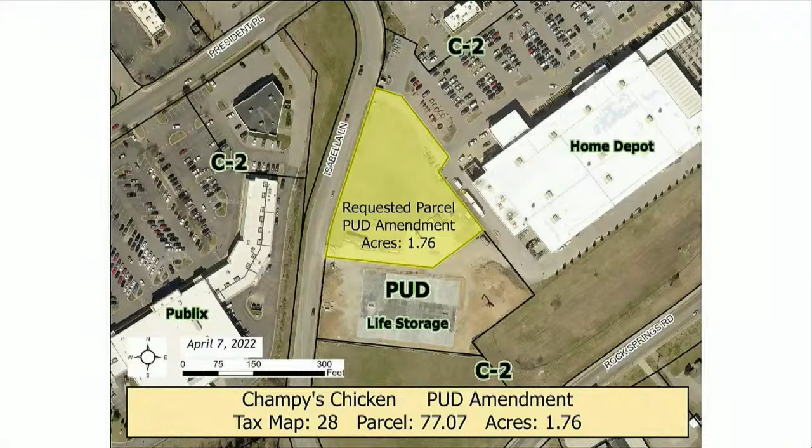That life storage building it would sit in front of is going to block a lot of it. That's a tall building. And I think this corner down here will develop as well at some point, so your sight line off of Rock Springs is at some point going to be blocked from that point of view. I know this corner behind Home Depot at Isabella already gets a lot of looks, so I think it'll add to the blockage of that side of the building. But it's on a grade too, so they're up high, on top of that hill, at the highest point there.

With the frontage to Isabella - that's the reason I asked the question earlier - that seems to be predominantly the 95% approved material, correct? Correct, yeah. I think about the other side, at the Home Depot parking lot side, with all that rental equipment sitting there - it's not the most attractive thing, so I don't worry about that side as much as I would if it were another business that didn't have all that equipment sitting out in their parking lot.

Like I said, it's attractive. It's a good-looking building. It's unique, and your marketing aspect of that is great. I mean, people will know what they're going to when they see it.

As far as the neon for clarification, the sign ordinance actually does allow for neon signs, so that's certainly something you all could include if you wanted to.

Okay, our next item is Ayub Ishak, Delacy Place, 12372 Old Nashville Highway, rezoning request C2 to PRD. This is a rezoning request. You all have seen a similar request on this property recently, but this is different than what you looked at last time. This is a PRD request, about 13.85 acres, requesting to rezone just a portion of the parcel, not the entire parcel. The surrounding zoning is a mix of C2, R1, and R2. The land use plan for this area is the Old Nashville corridor character area, which would support a mix of neighborhood-scale retail and personal services as well as townhomes and attached residential. The major thoroughfare plan shows Mason Tucker Drive extending as a collector from Todd Lane through the site to connect with Old Nashville Highway at the existing intersection with Rocky Fork Road. This extension would be difficult at that location due to TVA power poles in the area near Old Nashville Highway. They have shown an extension proposed to align with the proposed driveway for Talia Trace, which has been approved by the town council, so they would line up at that location. This requested PRD is again different from what you looked at before. It's 100 townhomes, with 5.18 acres of the parcel to remain C2, which would basically be all of the Old Nashville Highway frontage.

There is a cemetery that is actually part of the property, it's all part of this parcel. They are including that in the rezoning request, but it will be divided off as part of the development, and the family would maintain that parcel ownership.

We did have a few comments regarding fire hydrant locations and some dimensions of the hammerhead turnarounds, and they have addressed that. The hydrants would actually be shown on the site plans, and that's fine.

We did ask for a traffic study, and they did provide that. We did receive that, and there are a few recommendations from that. Basically, the road extension will be a 3-lane cross-section, and then obviously a lineup as we discussed, and then the intersection, when the four-way intersection is created with Todd Lane and Mason Tucker, it would be a four-way stop condition there. So that is one of the recommendations of the traffic study.

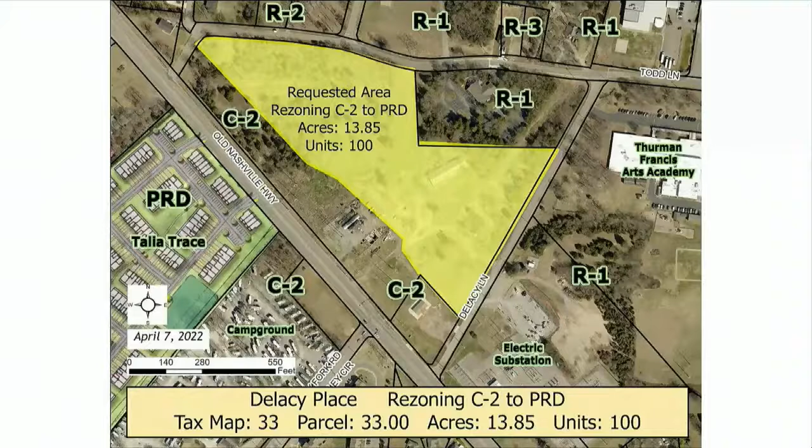Do I have another motion? I can make one, I don't know if they're gonna like it. But make it. I'll make this motion to approve the staff comments and reverse flip the west side units that currently face the Todd Lane units. Add back patios on all units, fenced back patios with all units. And on the east side of Mason Tucker, remove the 6 units that face Todd Lane and give that to playground space. Okay, you've heard the motion. Do I have a second? Second. I have a motion and a second. Further discussion?

All those in favor of this motion, please signify by saying aye. Aye. Opposed? Aye. 6-1. Okay.

Mr. Chairman, yes, just out of respect of our citizens' time, I would like to do a time check and point out that we've spent a whole lot of time on the first two. I just want you to know we realize that. That's fine, I think the discussion was worthy of the time given on both. Both were, I don't think difficult's the word, but both were challenging as far as working through and making sure that we get it right for the town.

Our next item is item 3 under rezoning request: Hardik Patel, corner of Almaville Road and Seminary Road, rezoning request I-2 to C2. Yeah, this is just a simple rezoning request, no PUD on this one, just I-2 to C2. It's about 2.94 acres at the corner of Almaville Road and Seminary Road. It's a vacant tract of land. Surrounding zoning is a mix of I-2, R3, R1, and PRD, which is Belmont to the east and Preserve at Stewart Creek across the street. Those are all the zonings in town, and then also RM in Rutherford County.

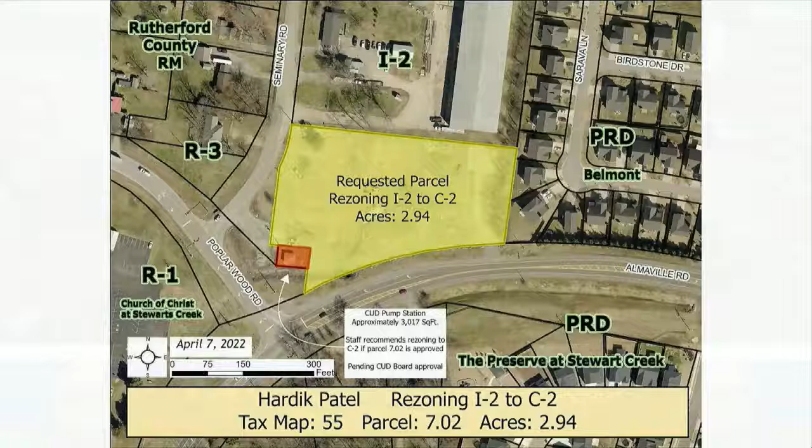As far as a buffer on that, with a road frontage we would probably want to beef up the streetscape there on that side to help block any parking spaces with lights and pulling in and that sort of thing. We would also try to limit the lighting at those property lines.

So it's something we could certainly address at site plan to make sure everybody's comfortable. And that would be the same if this were an I-2 and an industrial development came in — we would look at limiting the buffer, adding buffering, and limiting the light, making sure the lights shine internally and not externally, those kind of things.

I guess personally, I like that better than a machine shop or something else that would have that industrial use right there on Almaville Road, right next to a neighborhood like that.

Used to be a recycling center, I think that was brought up, and it's quite loud — trashy is the best way to say it. They would pull in and separate all the trash. I remember when it was there, years ago. It's no longer there; that business isn't there anymore.

Kevin, I didn't hear you — did you say there would be or not be access on the 102? Well, that's up to TDOT, I don't know what that access would be, that's why I'm asking the question. They'd have to get permission from TDOT to have an access cut there.

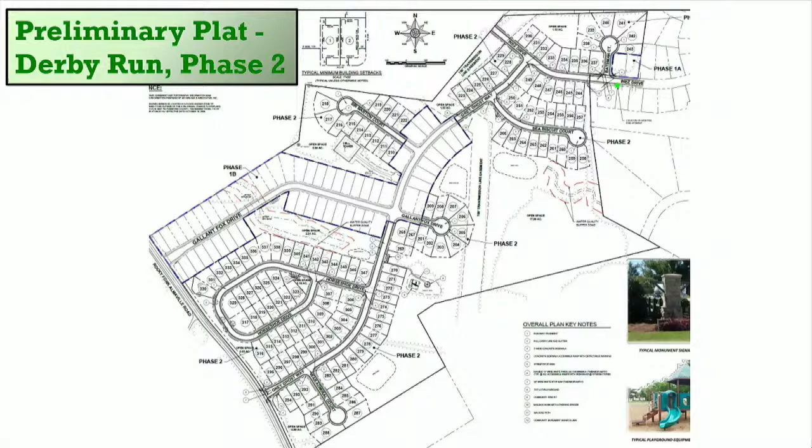Comment number 6 regarding the critical lots — there are about 3 critical lots we thought met the criteria, and they have designated those 3, so we can remove comment number 6.

Comment number 7, they are showing the right-of-way. We did ask them to label that at 40 feet from the center line. They're showing 15 feet from the existing right-of-way line, and we asked for 40 feet, measured from the center line. So we would want to keep that comment.

Comments 1 through 5 we would keep as well; those are just standard comments. Comment 7, as I pointed out, and then 8 through 10 are also kind of standard comments we would want to keep. Then 11 and 12 we can take off — those are utility plan and construction plan comments. We did point those out to them, but we can remove them.

So it's 1 through 5 and 7 through 10. And with those, we can recommend approval of that plat.

Kevin, I'm hearing this is consistent with what we previously looked at. It's consistent with the approved PUD, yes.

Anything from the commission? Do I have a motion? Move to approve with staff comments. I have a motion to approve with staff comments. Do I have a second? Second. I have a motion and a second to approve with staff comments. Further discussion? Hearing none, all those in favor signify by saying aye. Aye. Opposed? This motion's approved.

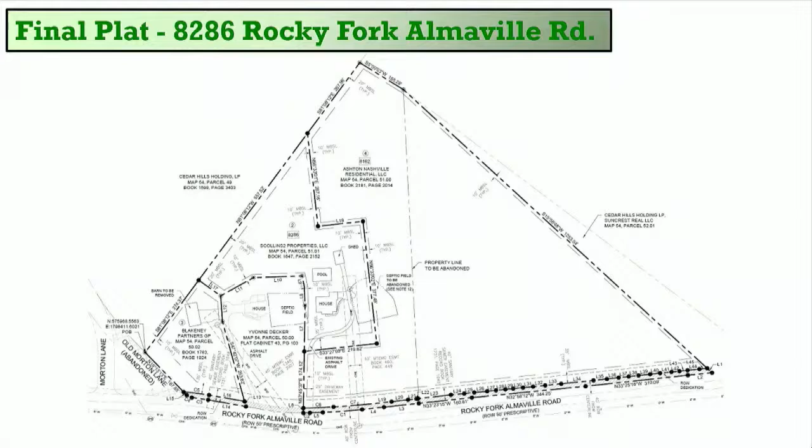It's 3 lots, about 20 acres total, but 3 separate lots. We had 3 comments. First, they are showing the right-of-way along Rocky Fork Almaville Road. They do still need to add the land surveyor's signature and then the owner's and CUD and TDEC prior to recording. So we will need to keep all 3 comments, but with those 3 comments, staff can recommend approval.

Okay. Questions for Kevin? This looks pretty straightforward.

Do I have a motion? Motion to approve with staff comments. I have a motion to approve with staff comments. Do I have a second? Second. I have a motion and a second to approve with staff comments. Further discussion? I'm going to abstain, Chairman. Okay. All those in favor of approving this item signify by saying aye. Aye. Opposed? This motion's approved.

Our next item is Cedar Creek Townhomes Phase 1, Enon Springs Road West. Owner developer Alcorn Properties LLC.

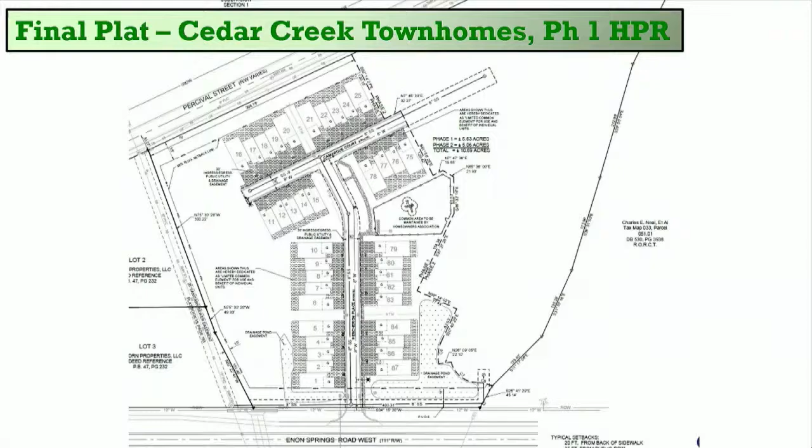This is just the horizontal property plat for the townhomes, for phase 1 of the townhomes. It's about 10.89 acres as part of the Cedar Creek Townhomes PUD. We had just a couple of minor comments regarding the right-of-ways, and adequate right-of-way does exist. We still need to add the signatures of the owner and the legal counsel prior to recording, so we need to keep those 2. We did receive the 911 approval for the road names, so we can take comment number 3 off. With those further 2 comments, we would recommend approval.

Okay, questions for staff? Do I have a motion? Move to approve with staff comments. I have a motion to approve with staff comments. Do I have a second? Second. I have a motion and a second to approve with staff comments. Any further discussion? All those in favor signify by saying aye. Aye. Opposed? This motion is approved.

Our next item is Greystone Phase 1A, Rocky Fork Road, owner developer Greystone West and Compass Land Group LLC, c/o Andrew Etheridge. This is phase 1A of Greystone. This is 41.95 acres, 150 lots. It's all part of the Greystone PRD.

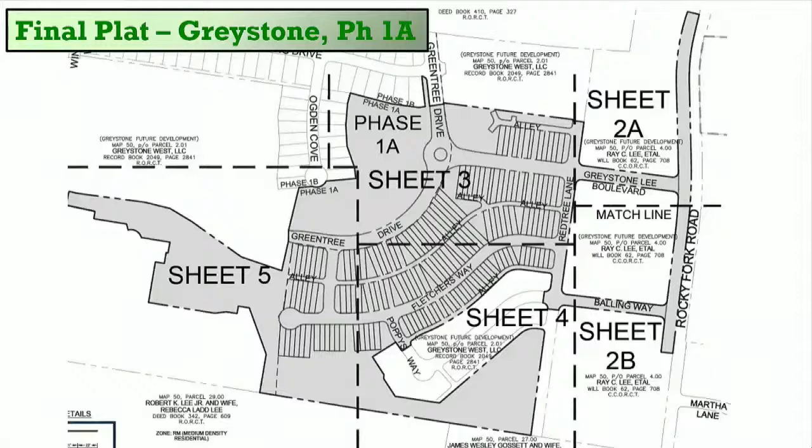The thoroughfare plan does designate Greentree Drive as collector and Rocky Fork Road as our principal arterials, and they are showing right-of-way on both of those streets to meet our requirements. We had just a couple other comments regarding signatures and everything. No building permits can be issued until the Olive Branch Sewer extension from that sewer is complete, and those are, of course, both under construction, I believe.

This area is now under the town of Smyrna for water service, but CUD still does provide service currently to 2 existing houses that are in that area, and until that can be taken care of, they did ask to have their signature block here, so they have added that. Comment number 6 has been addressed, so that can be removed. Both of those houses are actually not a part of this development, but until the water line can be put in place for this development from Smyrna, they are still providing the water there.

So again, with removing comment 6, staff would recommend approval with the other 5 comments.

Kevin, there's no changes to what we've previously looked at here. This final plat matches the approved preliminary plat and approved PRD.

Any other questions or comments? Do I have a motion? Move to approve with staff comment. I have a motion to approve with staff comments from Amy. Do I have a second? Second from Mark. I have a motion and a second to approve with staff comments. Further discussion? All those in favor signify by saying aye. Aye. Opposed? This motion is approved.

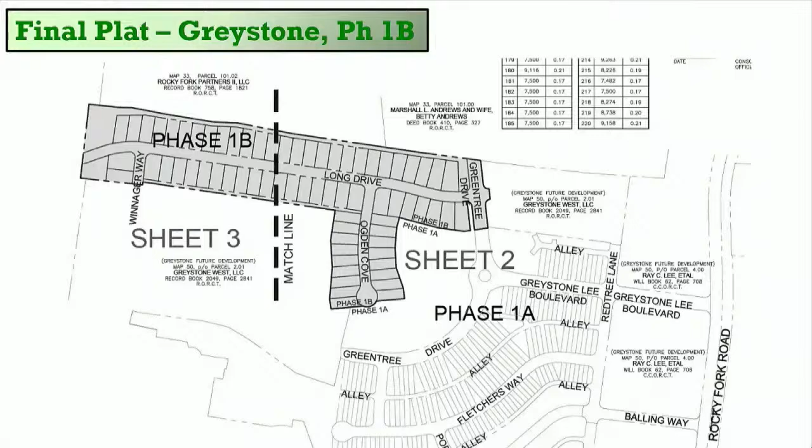This is again Phase 1B of the Greystone development, 70 lots, 18.06 acres. We had some very similar comments to the previous one, other than CUD is not providing any services in this area, so they are not on the signature block for this phase. But we would want to keep comments 1 through 4. With that, staff would recommend approval.

Questions or comments? Hearing none, I'll entertain a motion. Move to approve staff comments. I have a motion. Who said that quickly? I have a motion and a second to approve with staff comments. Any further discussion? All those in favor signify by saying aye. Aye. Opposed? This motion is approved.

This is a plat, there's a site plan later on in your agenda for 7B of this plat, but this is just an existing Lot 7 of Smyrna Commons being divided into 2 lots, 4.83 acres. We've had standard comments regarding the right-of-way for Sergeant Asbury Hawn, which is there and adequate. They have addressed comment number 2 by adding the signature and stamp of the surveyor, so we can remove that. We just need to keep comment 3, which again is just a standard comment.

So at this point in time, all we're considering on this motion is just a subdivision of this lot, dividing it into 2 lots. There'll be a site plan later on, for 7B, not 7A.

Does anybody have anything for Kevin or staff on this? Move to approve staff comment. I have a motion to approve with staff comments. Do I have a second? Second. I have a motion and a second to approve with staff comments. Any further discussion or questions? Hearing none, all those in favor signify by saying aye. Aye. Opposed? This motion is approved.

Our last item under our final plats is Westover Phase 2B, Rocky Fork Almaville Road, owner, developer, Westover Developers LLC.

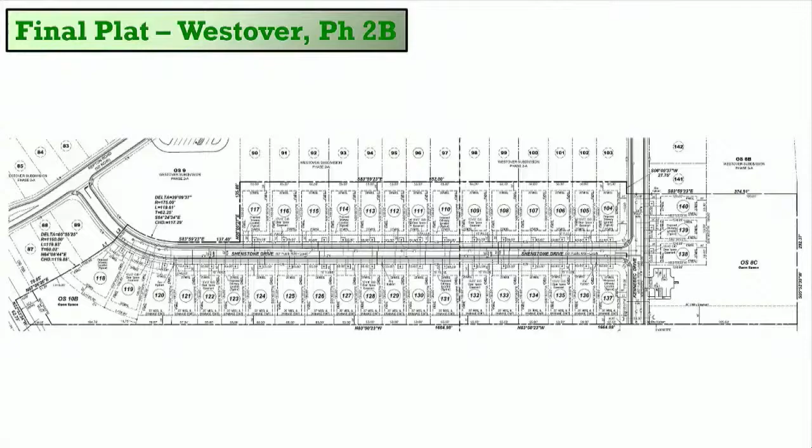This is, again, final plat, Phase 2B of Westover, 37 lots, 10.57 acres, part of the Westover PRD. They are designating Rocky Fork Almaville Road as a minor arterial and showing the right-of-way there. Number 2 is a standard comment. We asked them to add a 20-foot public drainage easement on the back of several lots because of drainage, and they have shown it, so we can remove comment 3. Comment 4 is regarding adding the signatures of the owner and CUD, so we need to keep that. Comments 5 through 8 are all CUD comments, so we would need to keep those as they work through that with CUD. So with those comments minus comment 3, staff can recommend approval.

Questions or comments from the commission? Do I then have a motion? Move for approval of staff comments. I have a motion to approve with staff comments. Do I have a second? Second. Have a motion and a second to approve with staff comments. Further discussion? All those in favor signify by saying aye. Aye. Opposed? This motion is approved.

We are now on to site plans. Kevin, item number 1 has been withdrawn. Is that correct? They actually didn't withdraw, they requested a deferral. So if you all can just make a motion to defer that one to next month, that would be great.

The first agenda item was Second Wave, Motlow College Boulevard, Sam Ridley Parkway, Jeannie Lane, owner/developer Second Wave Development. They've asked for a deferral, so I will entertain a motion. Motion to defer. Do I have a second? Second from Andrew. I have a motion and a second to defer. All those in favor of deferring this item signify by saying aye. Aye. Opposed? This item has been deferred.

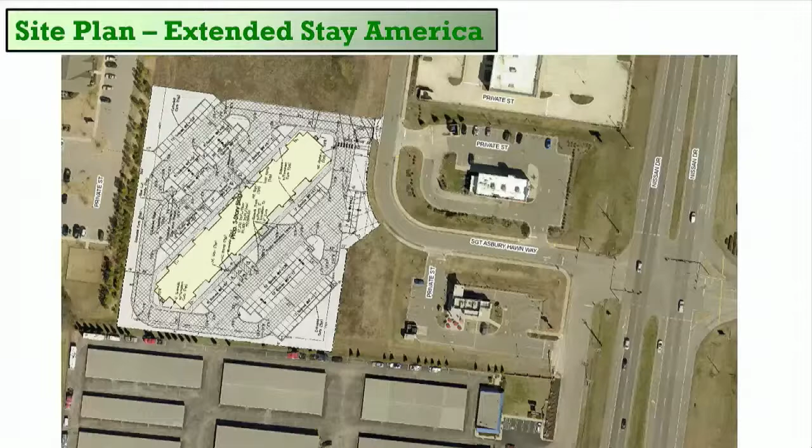Vehicular use area is 62,278 square feet, which would require 6,228 square feet of landscaping. Applicant is proposing almost double at 11,790 square feet. Total parking is 121 spaces, which is 1 per room, and they are showing 126. Handicap required is 5 spaces, and they're showing 5 as well. Landscape plan shows a type C landscape buffer along the western rear property line, bordering the apartment complex. Shrubbery is proposed around the base of the building, as well as additional shrubs and trees shown within landscape islands and around the parking lot.

Architectural elevations show building materials consisting primarily of brick with stone and EIFS. The rear side elevation would be visible from the entrance ramp leading from Nissan Drive onto South Lowry Street, which is south of this proposed development. That elevation will be required to meet the 75% primary material requirement. Currently they're showing 61%, which would be a replica of the smaller side facing Sergeant Asbury Hawn Way. They're showing a little too much EIFS on that side, so staff would recommend cladding it similar to the other short side, which is mostly brick.

Standard comments - a couple remain as staff comments. Comment 1 regarding the auto turn has been addressed. Comment 2 regarding the percentage of materials for the entire building - they show the material percentages for each side, but we'd like it shown as a whole. We don't see any concern as far as the overall material percentage meeting the requirements, we just want them to show what it is. Comments 3, 4, and 5 were all utility comments. Comment 6, dumpster enclosure elevations can be removed. Comments 7 and 8 were utility comments that have been addressed and can be removed as well. Comment 9 was regarding the primary material elevations meeting 75% for the Nissan Drive to South Lowry Street entrance ramp, just to meet design review requirements. Comment 10 went along with comment 3's utility comments, and we can remove that as well. So staff comments 1, 6, 7, 8, and 10 can all be removed, and we'll leave the rest, and with that would recommend approval with those comments.

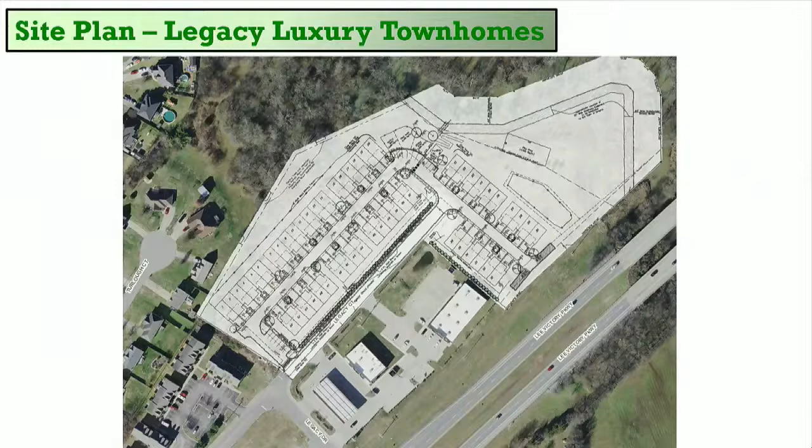I guess we have a fair amount of open space between the backside. Yeah, there's quite a bit of floodplain, but that's where they're leaving that open area, kind of along the creek there. They've already done some site work on this, right? Oh yeah, they're basically ready to get building permits, and since it's been more than a year since you all had approved it, they had to bring it back to you. Other questions?

Do I have a motion? I move to approve the staff comments. I have a motion to approve the staff comments. Do I have a second? Second. Second from Amy. I have a motion and a second to approve the staff comments. Further discussion? All those in favor signify by saying aye. Aye. Opposed? This motion's approved.

Our next item is Raising Cane's, 380 Sam Ridley Parkway West, owner-developer Raising Cane's Restaurant LLC. Raising Cane's is proposing a 3,331 square foot building along Sam Ridley Parkway West and Genie Lane. The property is situated between RaceTrac and Chicken Salad Chick and has road access to Genie Lane and a private access drive, which connects all of these parcels together. Proposed drive-through stacking lanes have the ability to accommodate approximately 25 vehicles, and that should provide adequate stacking to keep it off of Genie Lane.

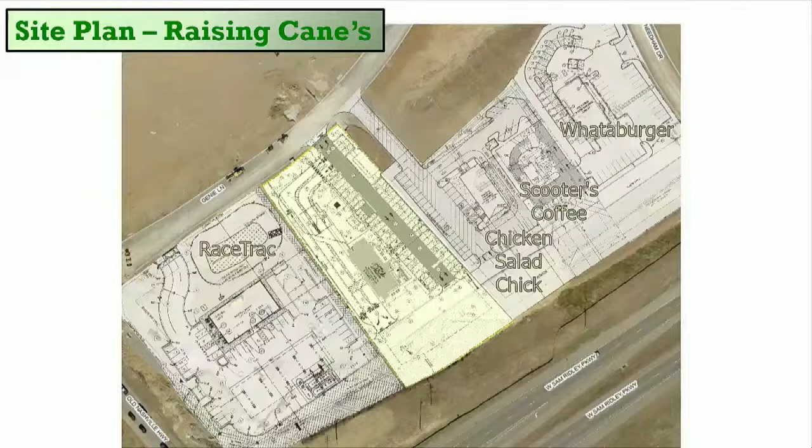If you can remember, this is a site that was previously approved for another restaurant, and they have since left, so now Raising Cane's has come in to take that spot. Square footage of vehicular use area is 28,911 square feet, which would require 2,891 square feet of landscaping; they are showing 3,188 square feet. Total parking required of 33 spaces is showing 44, and that would require 2 handicap spaces, and they're showing those as well.

Landscape plan shows trees and shrubs planted along Genie Lane, the private drive along the drive aisle. Additional shrubs are shown at the base of the building and in landscape islands throughout the site.

Architectural elevations submitted show a mixture of brick, glass and glazing, and EIFS. All four elevations have primary material of brick and glass and glazing at least 75.3%, so it does meet our design review.

A couple standard comments, all to remain, as well as staff comments. Staff comments 1, 2, 3, 4, and 5 have all been addressed and can be removed. Comment 6 was our utility comment to provide a backflow for the irrigation line shown at the site. With that, staff recommend approval with that comment and the standard comments.

Okay, questions for staff on this? This appears to be very similar, except with a similar different layout and type of ownership. Well, company for that matter.

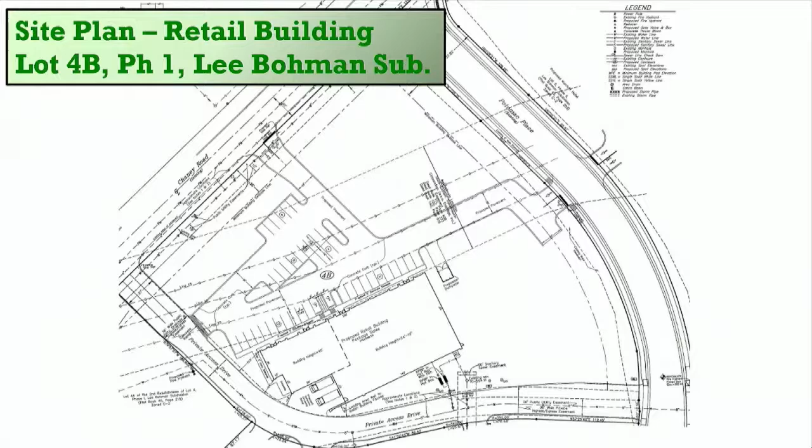I think you have a very legitimate concern, and plus we can't guarantee it's going to be box trucks. Yeah, you never know. It's not very deep, I think, what did we say Mitch, about 15 feet? For the side of the building off the road, yeah, about 15 feet roughly. So they are proposing a fence there which will help hide it, on the side closest to the access drive. That's not a bad thing, certainly.

That was just our concern, right? It was just the potential conflicts of a loading zone coming in and off directly into a street like that, even though it is a private street.

So, Tim Slade is sort of correct. We don't know what kind of vehicle may come in and out of there. Being a private street, what's the size of a box truck? Between 15 and 24 feet, depending on how big the truck is.

When we say 15 feet, that's the closest point of the building. I think it's deeper than that where the trucks would be. There's room there for a box truck, I'm not worried about that. It's more about the conflict, because you're going to have to be on the street and then back in off of the street, regardless of what type of truck.

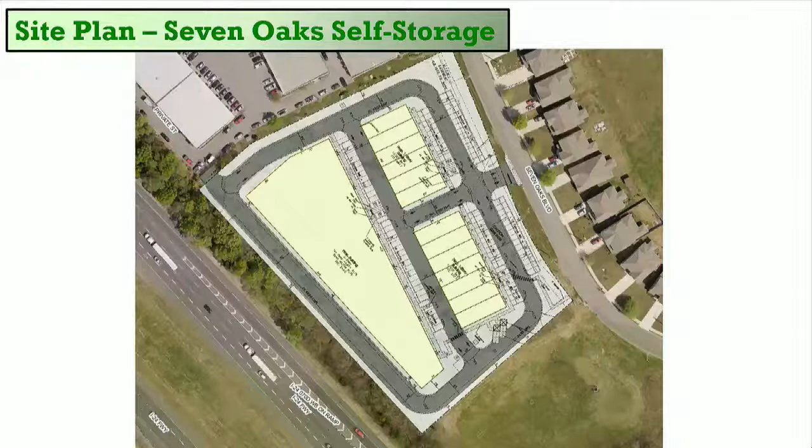On that back corner where this is showing going out, there's also an electrical box and a dumpster sitting there currently. It's possible that could either have been moved, or this drive would have to be moved. I think it's going to be all the same ownership, so in management, I think those kinds of issues probably — at least the dumpster — can certainly be relocated. The electrical can be moved too if it needs to be.

Like I said, we saw it again from when it came through for zoning as a positive thing, because it does provide that second way in and out for the development from an emergency response perspective.

I think I have to agree with staff on that. I like the idea of having that second access there. Will it always be used? No, but if it's needed, it can be used. I agree that the people on the existing development will continue to use the driveway they always use, and these folks will use the other one. It may not be used very much, but it is there if needed.

Other questions or comments?

This site plan is consistent with what we have. It's consistent with the zoning. Yes, zoning, yeah.